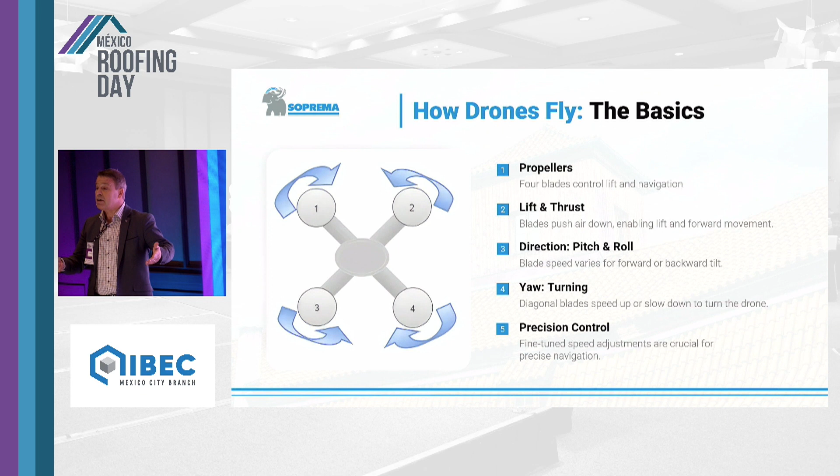First, I'm going to put up slides explaining the big points, and after that there will be video to visualize everything that I spoke about.

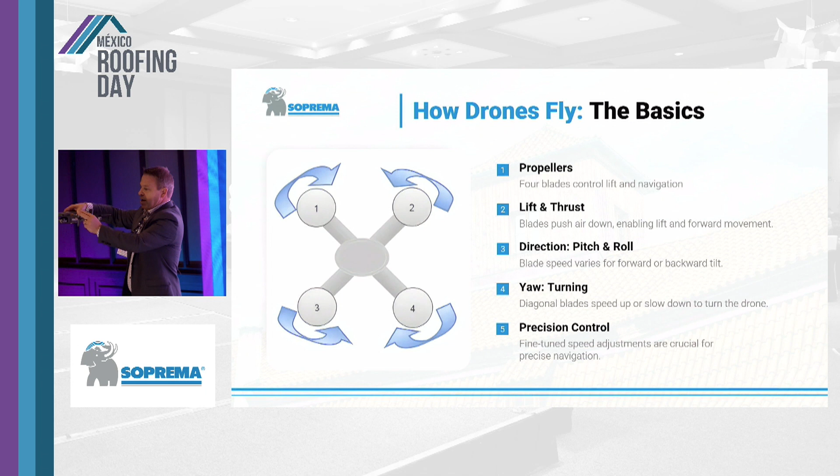So how does a drone fly? Easy, you'll say, well the blades turn and it flies. Yeah, for sure, but how does it turn and everything? It's just easy, it's just the speed. If you take a drone, by changing the speed of the blades, the drone can turn on itself, go this way, up, down. It's just a question of speed. There's a controller inside that manages the speed of each propeller, and this makes it turn and go everywhere.

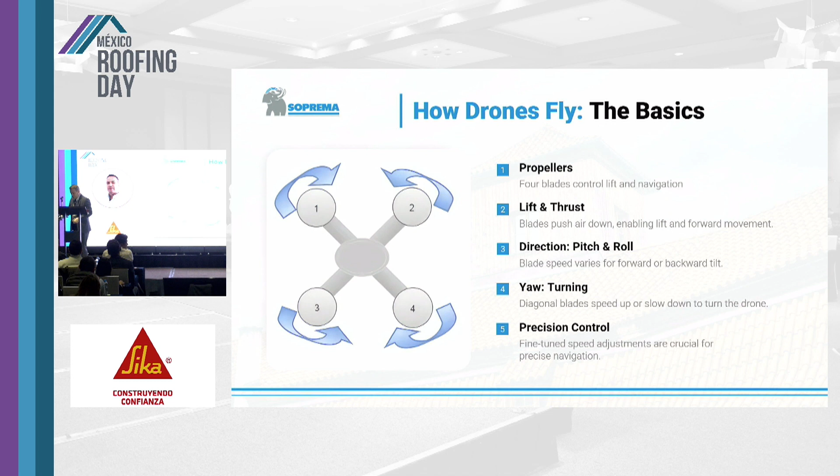So just the basics about drones - there are different types, but basically drones are positioned by GPS. There's a GPS on the drone, and it knows its position with the GPS. There's also vision - the drone can see. So when you're about 3 meters high, the drone will position itself with vision, seeing things and taking a focus to stay there. So it has GPS, and if it's inside, it will use vision positioning.

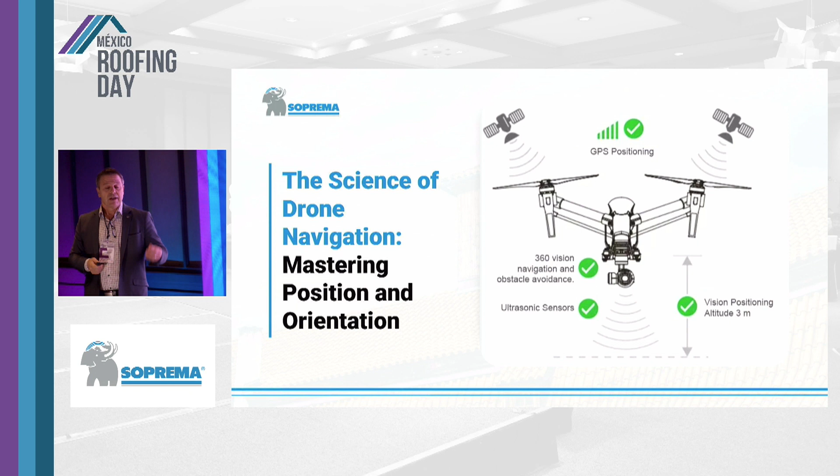Some drones right now also have ultrasonic sensors to sense objects, so they can stop if there's an object. And there are drones that use vision so well - I don't know if you saw the Skydio drone. This drone is crazy - you can run in the woods and it will follow you, and it will not hit a small leaf, it will go everywhere. This drone is just 3D vision and can navigate that way. Better than that, it now navigates in the dark by vision - they got near infrared vision, and it can navigate in the dark.

So this is basically just to tell you how drones are working - there's different sensor positioning, GPS positioning, that's really important. And that's the way a drone flies.

Now I've talked a bit about sensors. There's infrared sensors too - the small drone over here has an infrared sensor. Those infrared sensors are that big now, they used to be huge. At the beginning of my career, an infrared camera needed nitrogen to cool it, and it was that big and cost like $60,000. Right now you can buy an infrared camera on a drone, and it's crazy good.

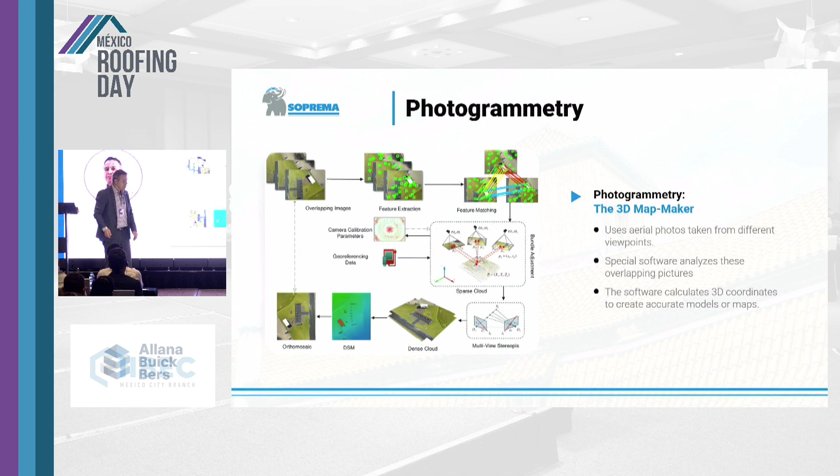Now this is the main thing I'm going to speak about - photogrammetry. So what is it exactly? That's just a map to show you - it's a bit complicated, but it's a software that does that. Photogrammetry is taking pictures. The drone, I'll show you a bit later, flies over a building and takes many pictures in a pattern. So it takes pictures, and the pictures overlap - all pictures overlap, like 80%.

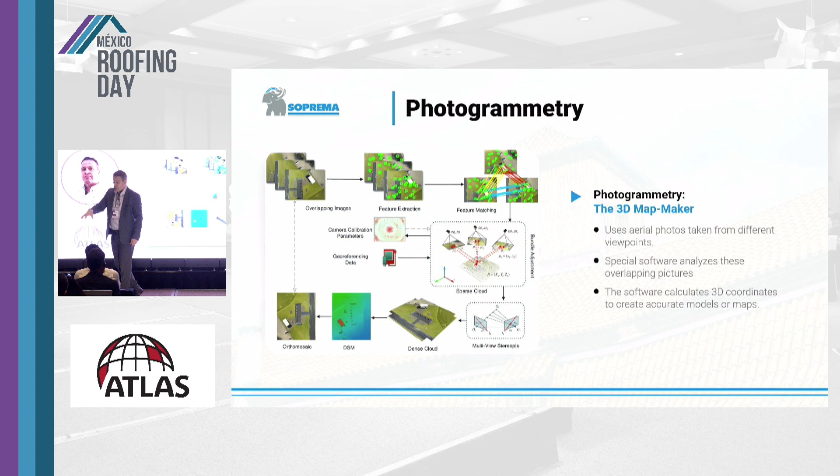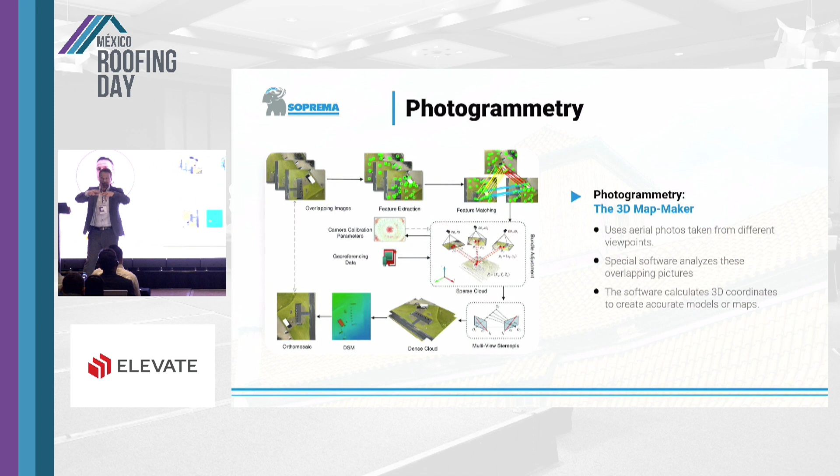So to do a survey of a building like this, it takes about 9 minutes, but it takes many pictures. Since many pictures see the same point, then you can build something in 3D. A bit like cellular - when you have 3 towers, they can locate you exactly because of triangulation. So it's the same principle - because of triangulation, you can reconstruct something in 3D. So photogrammetry is all about that.

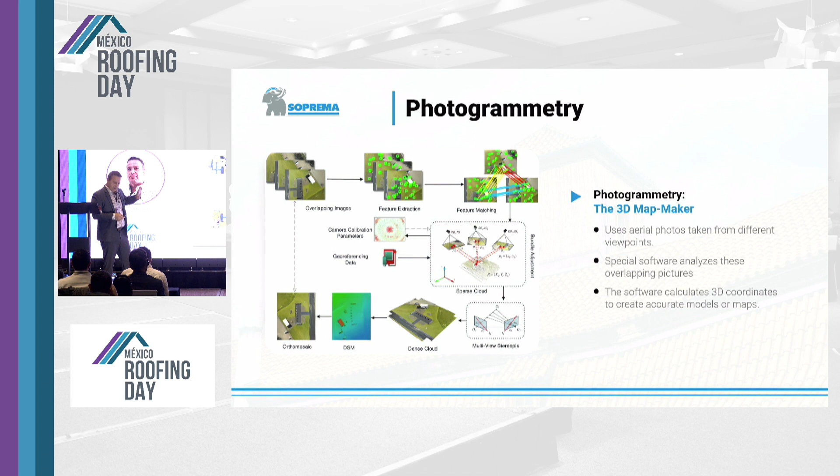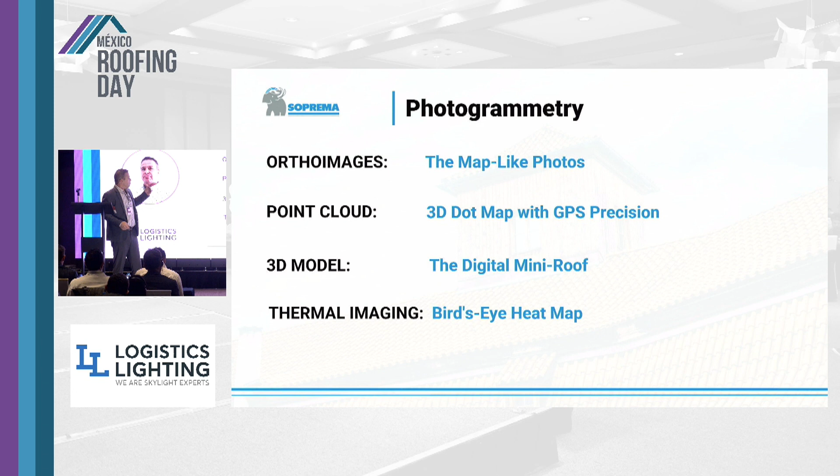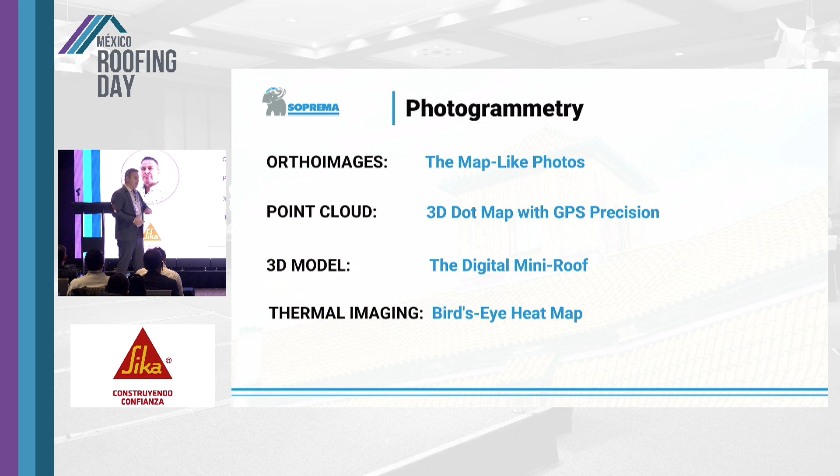So just remember that, and it's a software that does it - you don't need to do it yourself, there's software that does that. So there are 4 things in photogrammetry that we're using: there's ortho images, which is a big map of the area; there's point cloud, I'll show you what that is; 3D model; and thermal imaging. So all those are part of photogrammetry. By using all this, I'm going to show you what we can do with it, because we combine all this. It seems maybe complicated, but it's all done by software, and the result is what you need.

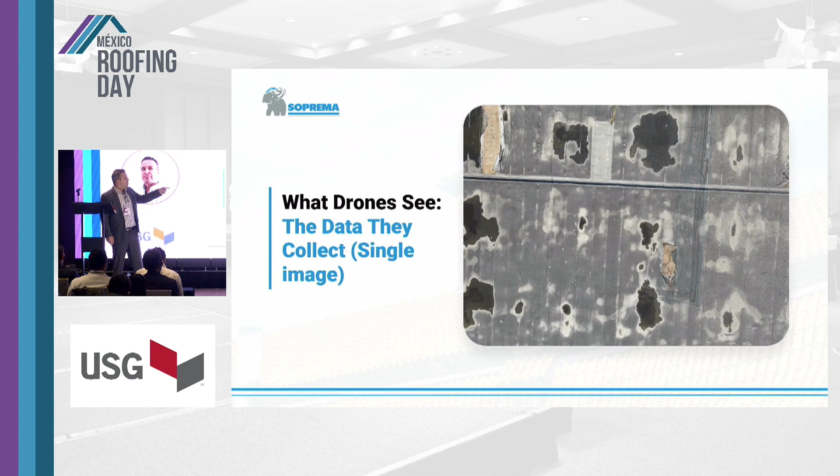So I need to go that way. So what does the drone see? This is just what I'm showing you here. It's just one image - you can see the quality of this picture taken by that drone. I'm 100 feet high, and you can see, it's just one picture. So you can see a lot.

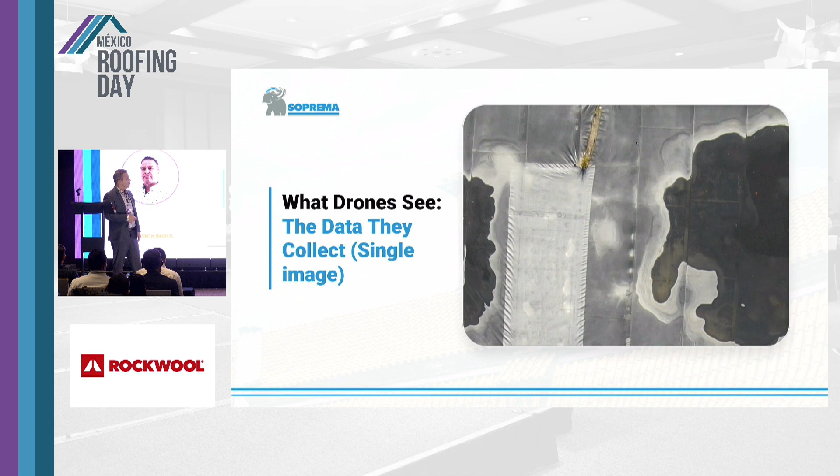When you have a view from the top, it's a completely different view than when you're walking on the roof and you see it from the side. It's just one picture that I'm zooming in and moving around. So the quality of the pictures is very good, and that's for that small drone, right?

And even in the parking lot, because when we do building inspections, we also do the parking lot. So it offers the customer way more than just the roof, right? You get also the parking lot, so you can offer more services to your client.

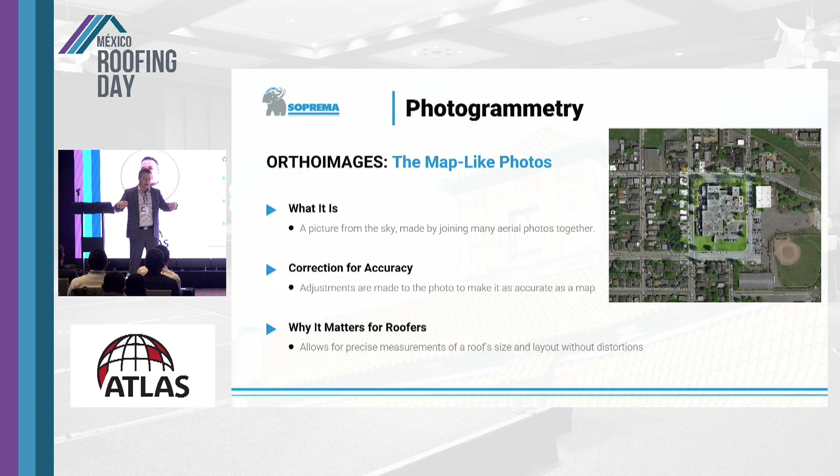So what is an ortho image? Like I said, it's a big image done with a drone - multiple pictures that are taken and put into a software. The software doesn't just stitch images together, right? It's a big map that's all to scale, and the map takes the place in Google.

So you see over here, we see the map, and we see Google map there. So we can import that map into Google Map. I think there's a small video there, just to show you the quality of it.

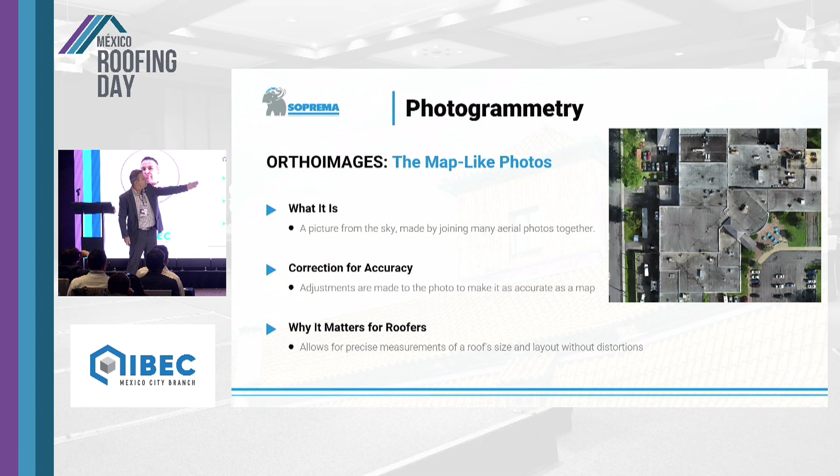See, we see Google there, and we see our map. See that you can zoom in, and this map is zoomable from everywhere.

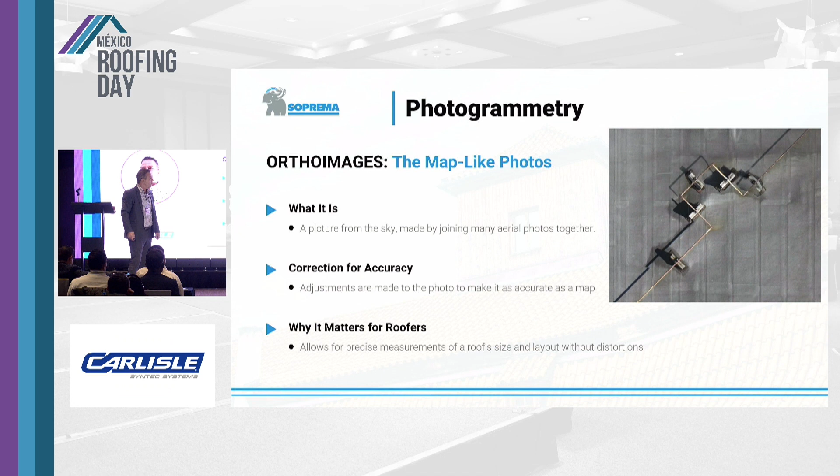So I'll choose the other one. So what is a point cloud? Well, I told you a point cloud is a million points that were done with the software. So the software creates a point cloud, and this point cloud has GPS on it. So every little dot has a GPS coordinate and X, Y, Z - you get altitude, longitude, and latitude of each of those points, and I'll show you later.

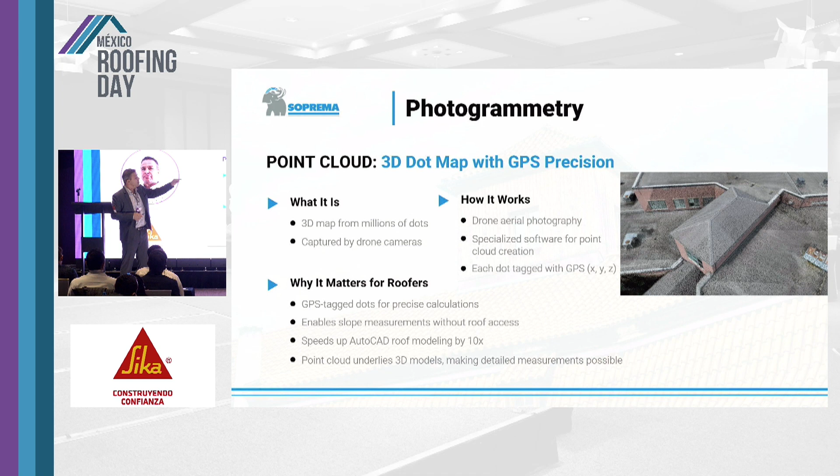So it enables possibilities, right? With this, you can import that into AutoCAD and do your drawing. It goes really, really fast. You can make measurements because of the point cloud. I'll show you in another slide, but you can do many things with it. And all that, like I said, will be put together afterward.

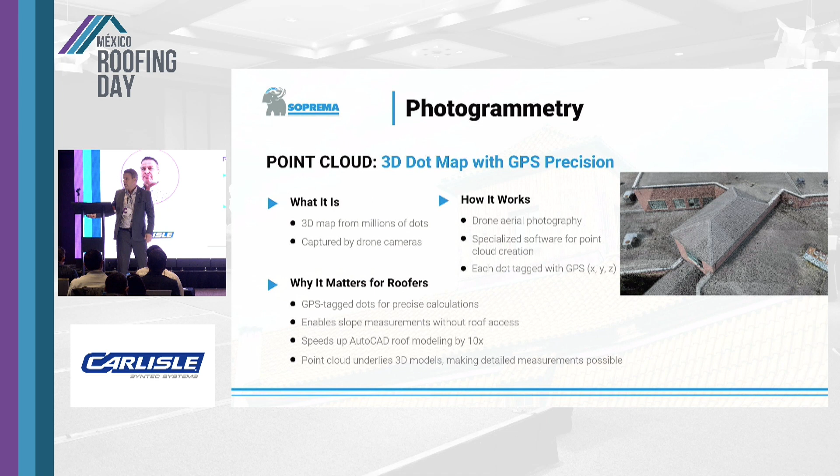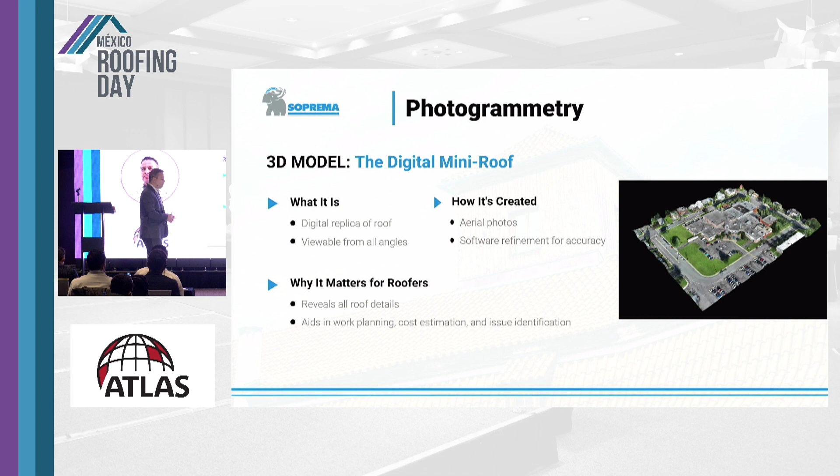So this is 3D photogrammetry. You remember a few slides ago, I said there are 4 things - now I'm showing the 3D model. So all this is taken with the same picture. With the same pictures, when you fly your drone in specific patterns, you will create your ortho image, you will create your point cloud, you will create your 3D model - all from the same pictures. I'll have video after that.

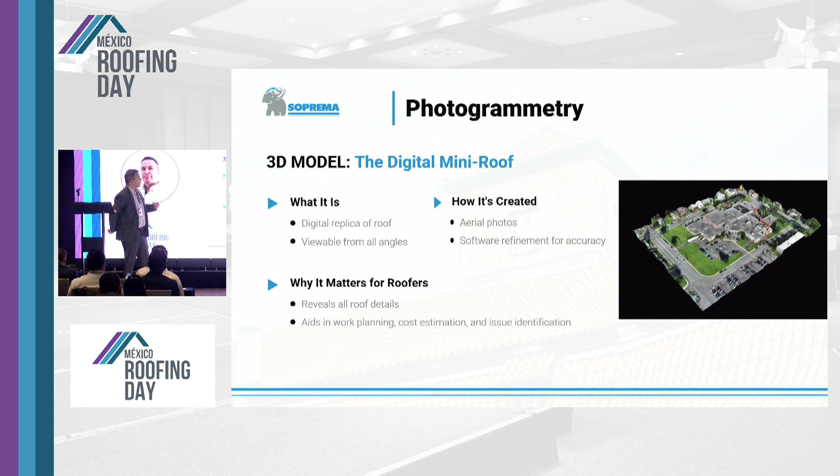So you can really easily see. I got a pointer over here... sorry, but it's not... no, it's not working. Okay, anyway.

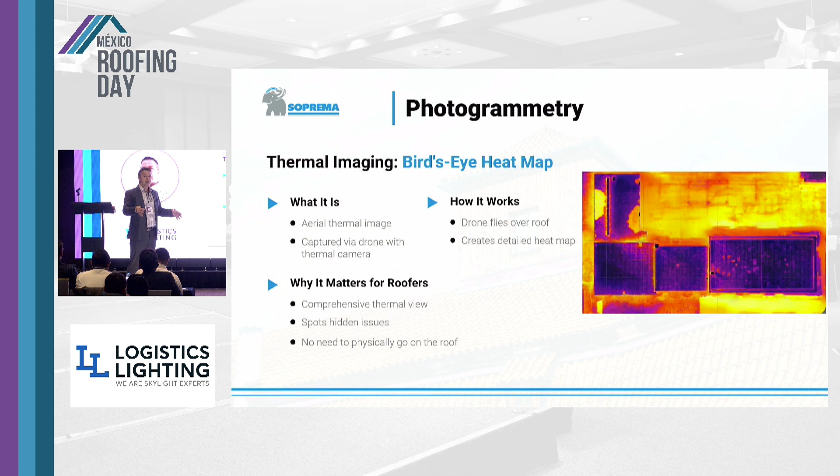So you see over here, it's hot - this is hot, so this is a wet area, right? I don't want to go into too much detail, but a quick explanation: an area that has water in the roof system, when the sun hits the roof, it gets warm. But as soon as the sun goes down, the wet area stays hot because it's water - it's a big mass, so it takes more time to get colder.

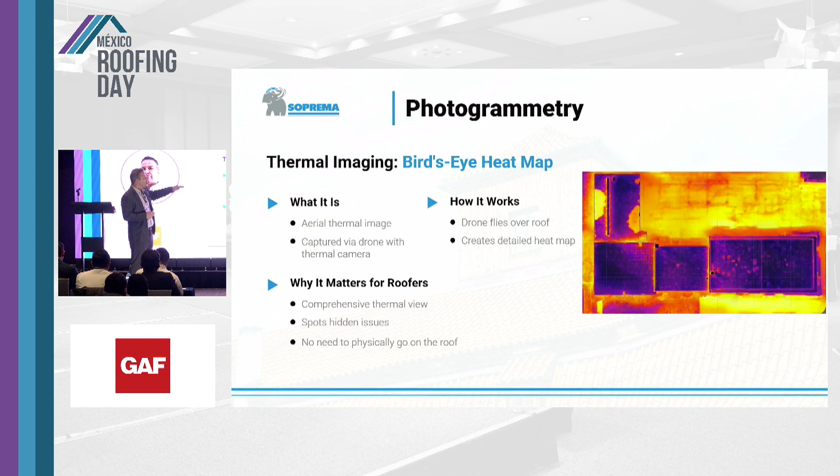So we just open the camera and we see. The only thing an infrared camera sees is hot or cold, right? That's the only thing - it doesn't see inside a wall, it doesn't see inside the roof, it just hits the first layer and tells you the temperature. So by knowing that this area is hotter, it means it's wet.

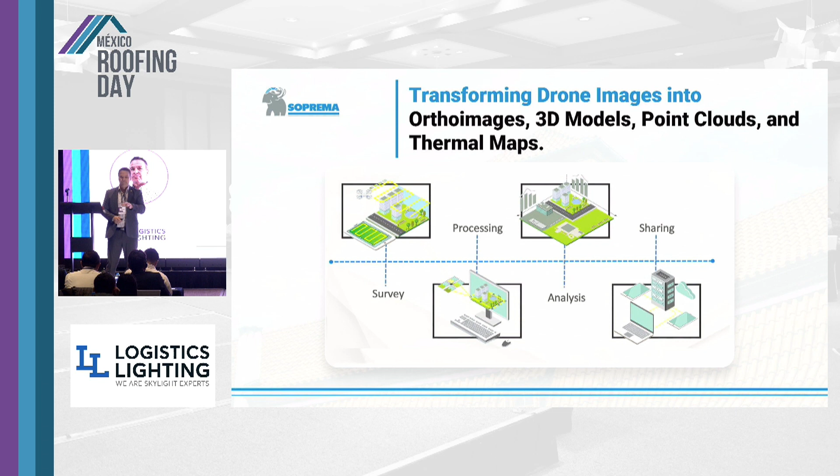So that's my first part. The second part will be more fun - we'll have images, we'll see more stuff, we'll see how it works. I just wanted to explain so you understand there are different things like point cloud, 3D, ortho image, thermal map. Now we're going to put all that together and see what we can do - how it can help you, the roofer, to make measurements and inspections quicker.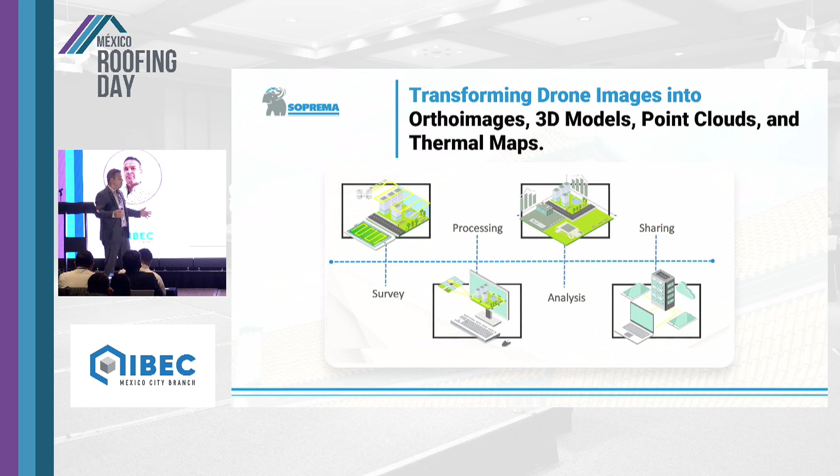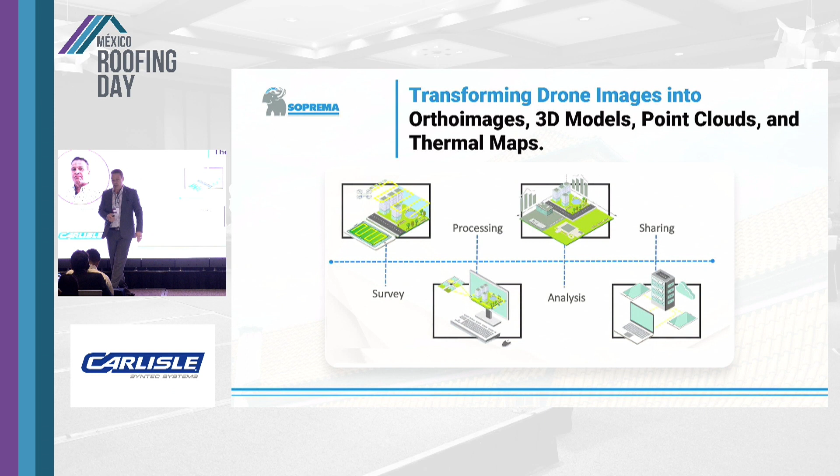So the process is really simple: you do a survey, you process everything on the computer, you analyze everything, and you share it with your client. That's the process of doing a roof inspection with a drone.

Okay, so just a small video explaining. This is where we are. I did a map, and the green line that you see here is where the drone would fly.

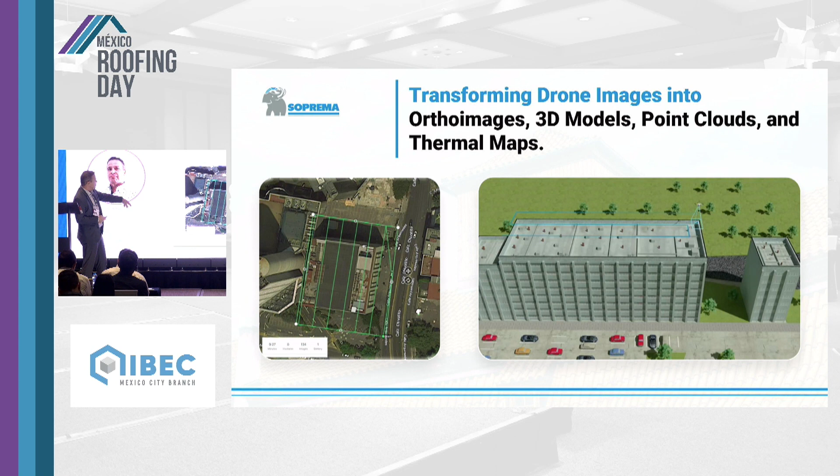The drone would fly in this pattern and take many pictures, about 134 pictures, taking 9 minutes 27 seconds. So it will fly and take the pictures, then you go back to the office, or it can be uploaded directly.

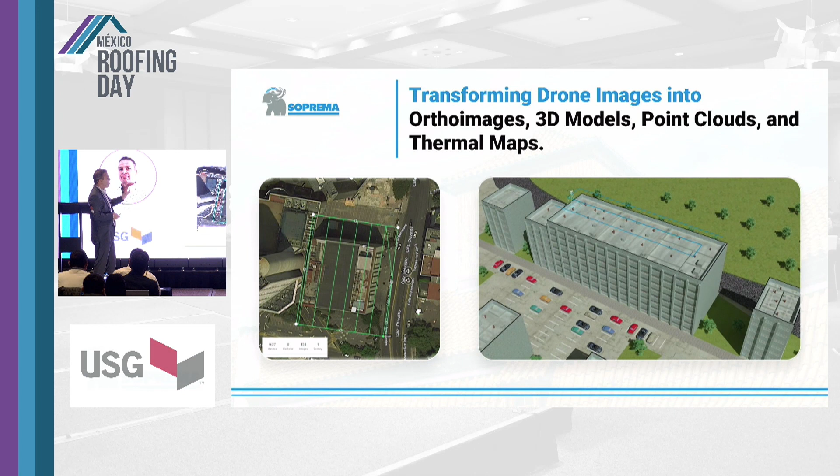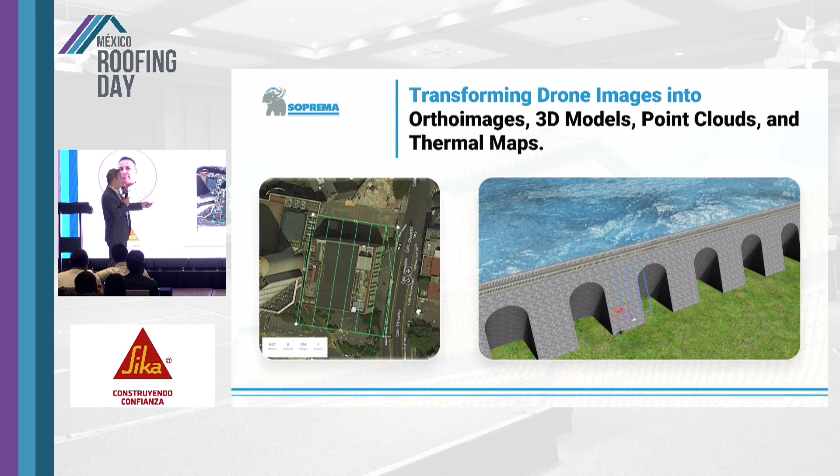See, the drone flies like this, over the roof. Right now it's close, but it's about 100 feet away. The drone can be used for roof, parking lot, dam inspection, so it can be used for anything. We use the pictures the drone takes, with overlap, to process and create our map. It can also do bridge inspection, anything.

And all that is automatic. You just set it up in your software and the drone starts and does its thing. You have nothing to do. The drone just flies, does all the inspection, takes pictures, everything, then lands back exactly where it took off.

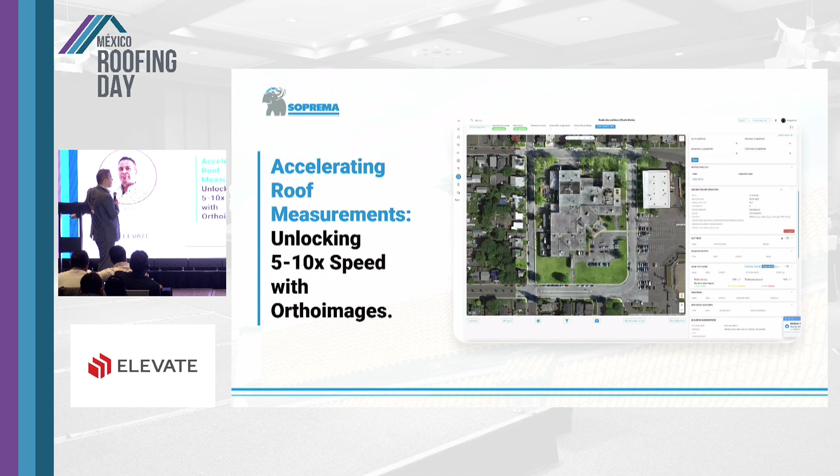So now you'll see that measurement is way faster. There's a video, see. This is an ortho image. This is the software we use, and the ortho image is inside this software. This is the Google map you have there, and this is the real map. So if you want to do a measurement on the roof, you'll see how quick it is.

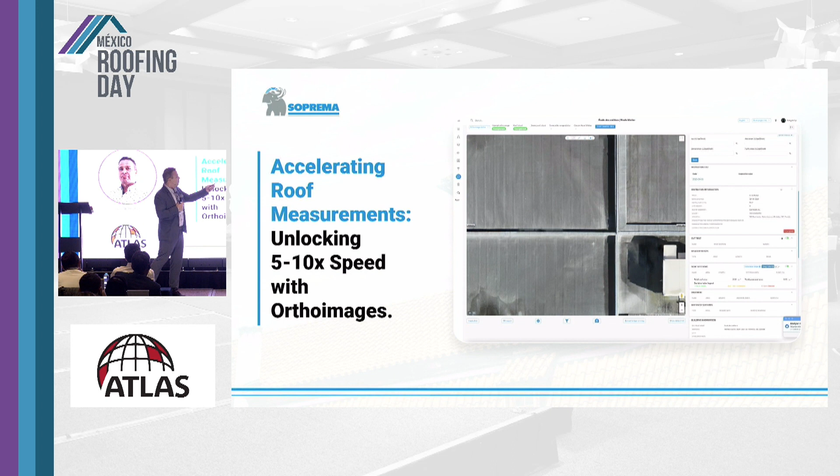You just go in, and you'll see that it's precise. You can move in, click on the corner, and it's so precise that you can click inside or outside of the parapet to make your measurement. So it's easy, you just go and make the measurement.

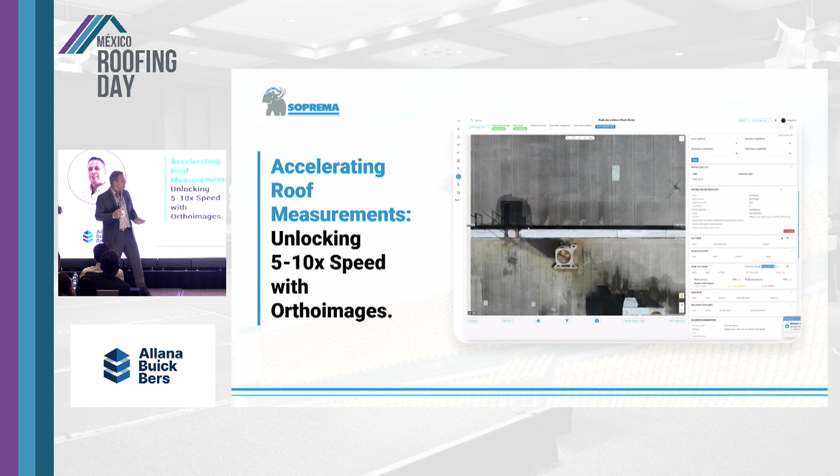Some people ask me, how precise is it? Well, I say it's more precise than two guys on the roof with a tape measure and the wind. When there's a guy 100 feet up pulling on a tape to make his measurement, this way is way more precise. You get millimeter-level results.

So now you've been measuring this roof section, and what's great about this software is that you can also manage the roof. You can put a name on the roof, then put all your info by clicking on the roof tag, and enter all the info of the roof. But I don't want to go into that detail. If you want info, we can talk about it after.

But what I'm saying is, if you want to make a measurement there, from there to the parapet, it's quite easy and quite precise. Making measurements by having two guys go on the roof takes time. This will save you much more time.

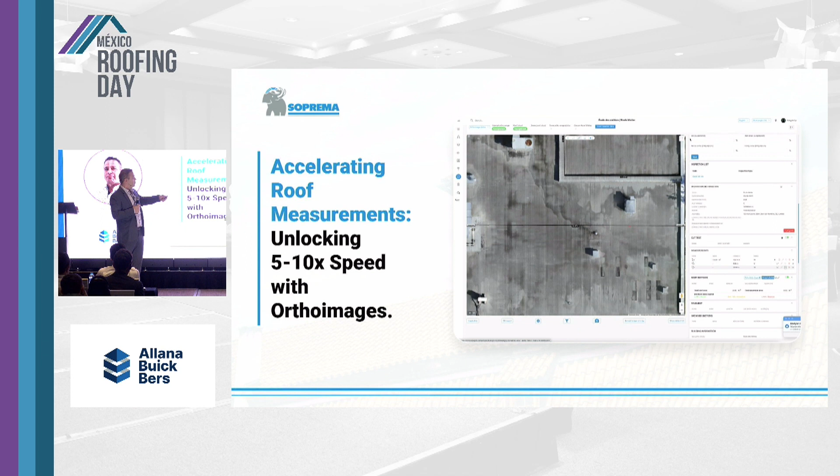I had a job to do, and the client was asking for an AutoCAD drawing. I said, you don't need an AutoCAD drawing anymore, you've got the real view of the roof. So why put icons on a drawing when I can show the real thing, because it's a real map. Even AutoCAD, for me, for roofs, is obsolete. We don't need AutoCAD anymore. We've got this, we've got all the measurements, we've got the drains, vents, everything. Everything is there.

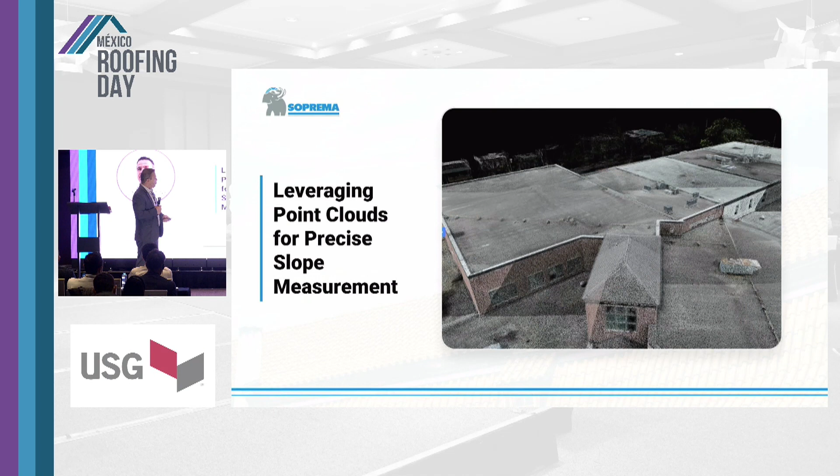Now, point cloud. I talked about point cloud, and asked why we use point cloud. You'll see. You see those dots, we'll zoom in and you'll see how many dots there are, and there could be many more. If you zoom in, each and every one of these little dots has a GPS coordinate.

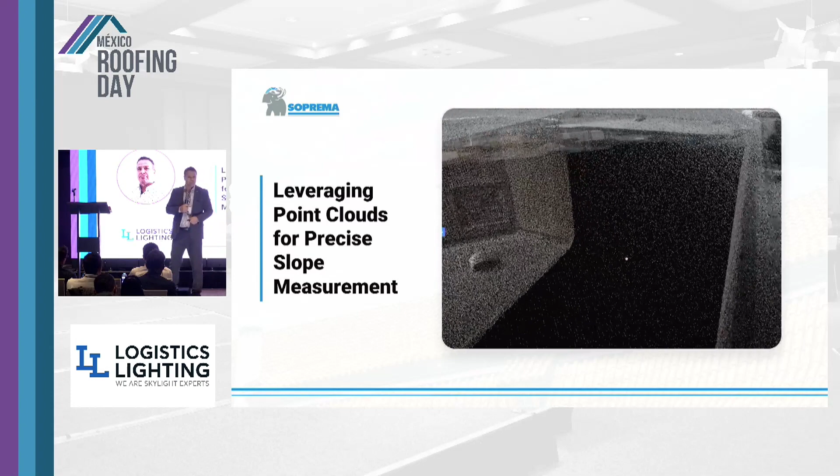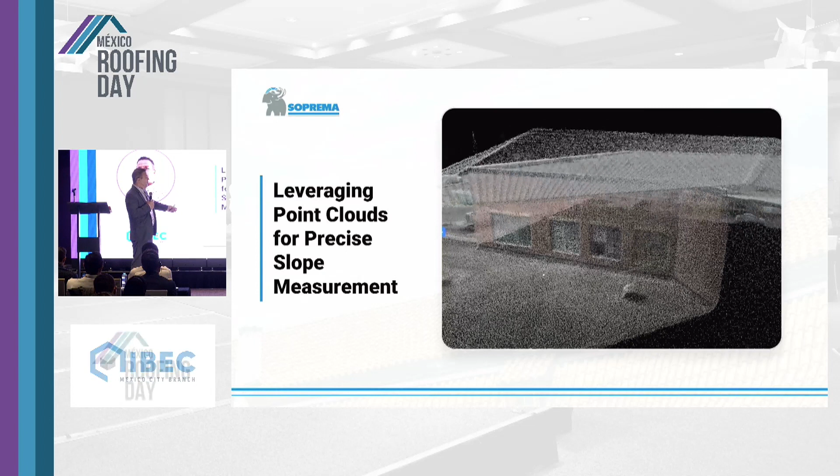So if you want to make a measurement, that's why we can measure on the map: when we click from here to here, we intercept one point cloud to another, and since they're GPS-based, we can measure the distance between both. You'll see we can also measure slope. So now, we can make measurements in 2D, but we can also make measurements in 3D.

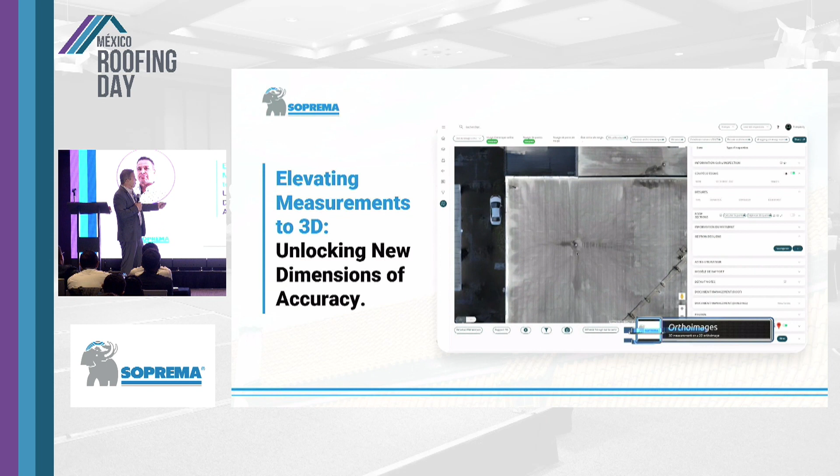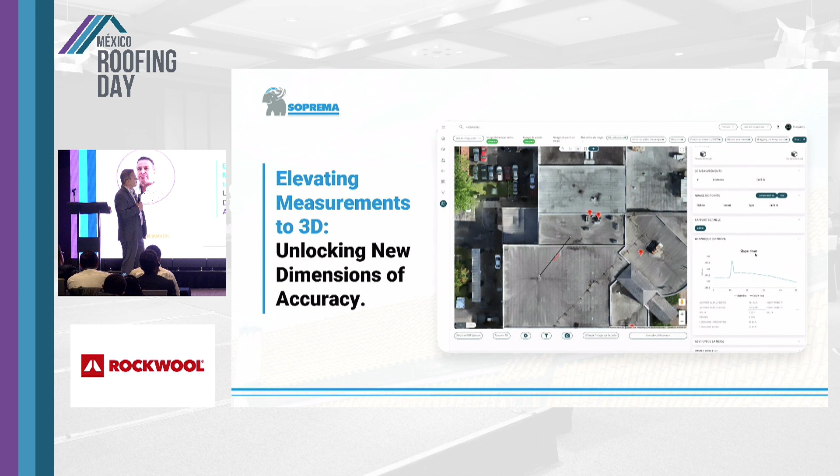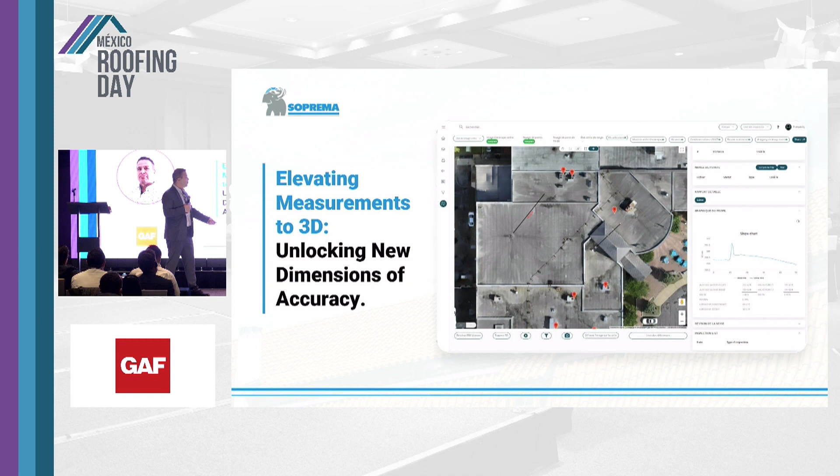So, same thing here. If I zoom in, I draw a line from here to here. Click, and you'll see the graph appear. And there's a dot, a white dot. It tells me where I am, it tells me the elevation, the difference in elevation, and it tells me the slope. So I don't need to go on the roof anymore to measure the slope, measure the height of the parapet, measure the slope. See over here, I did it over a roof, and it's all there.

So why can we do that? Because we got a 2D and we're measuring in 3D. That's because the point cloud is below, and the point cloud has a GPS coordinate in every dot. So with this, without even going on a roof, we can measure slope, we can measure where the equipment are, we can measure height, parapet height, everything, without even going on the roof.

So that's the technology right now. I had a project to do - I had 80 buildings to inspect across US and Canada. As a consultant, before Soprema, I was half the bid of everyone else, half the price, because I had this technology and they didn't. And I made 4 times the money I thought I would, because it went so crazy fast.

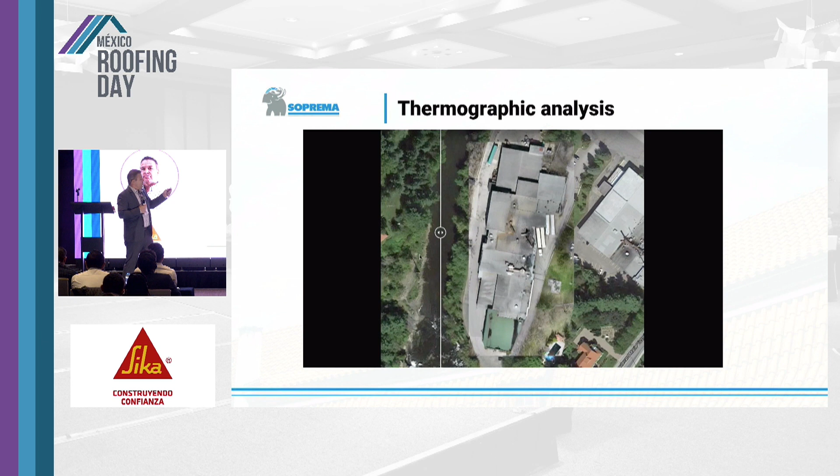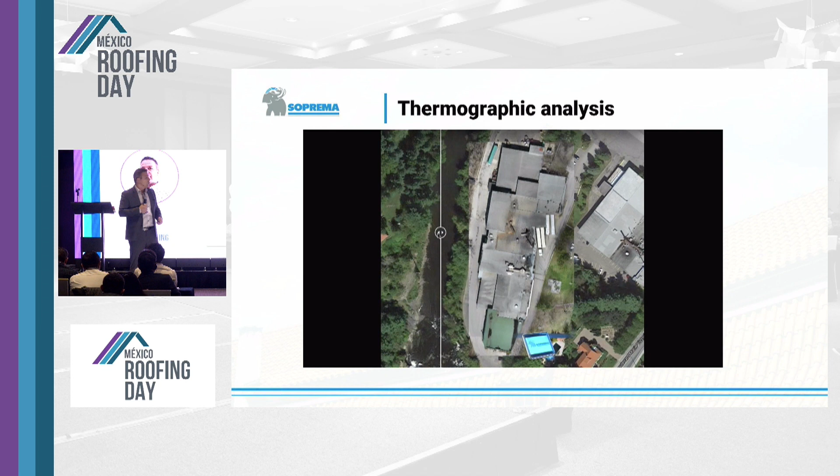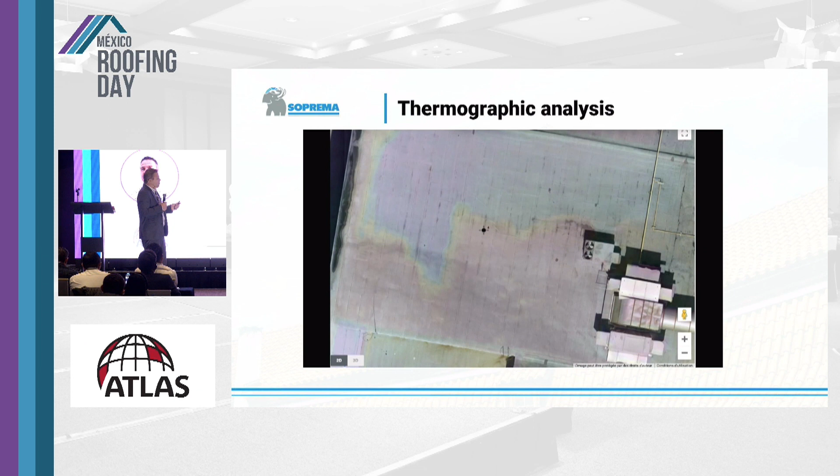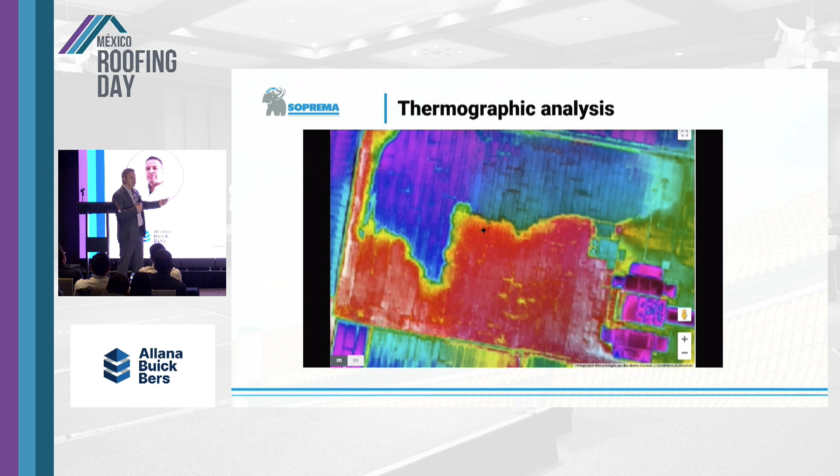Now, we said we could do thermal, right? You remember I said you can use a map, we can do a thermal map. But we can combine those. So we combine both, and it becomes really easy to compare, because the thermal map goes over the building. So instead of wondering where do I take that picture, where does it go, where is it, this or this - no, you see it directly. By overlapping both, and you can change the transparency, you can see exactly where your wet areas are. And with the software, you can draw around the wet area and it calculates the wet area. So you don't need to calculate it, you don't need to make measurements on it, since all the measurement is integrated.

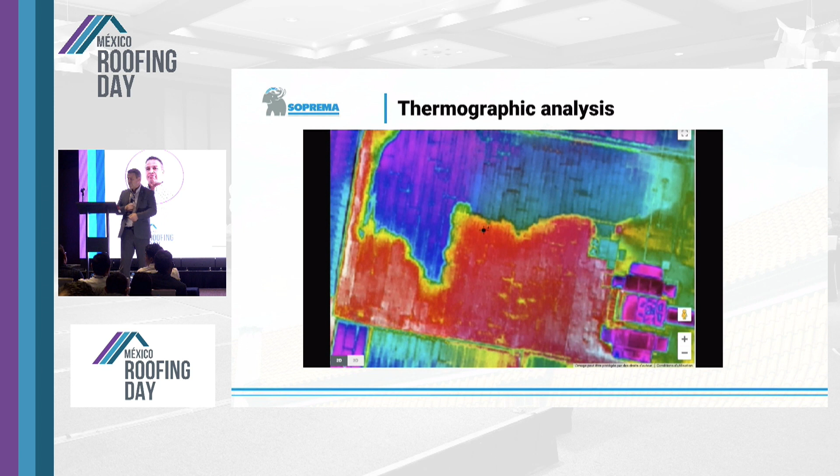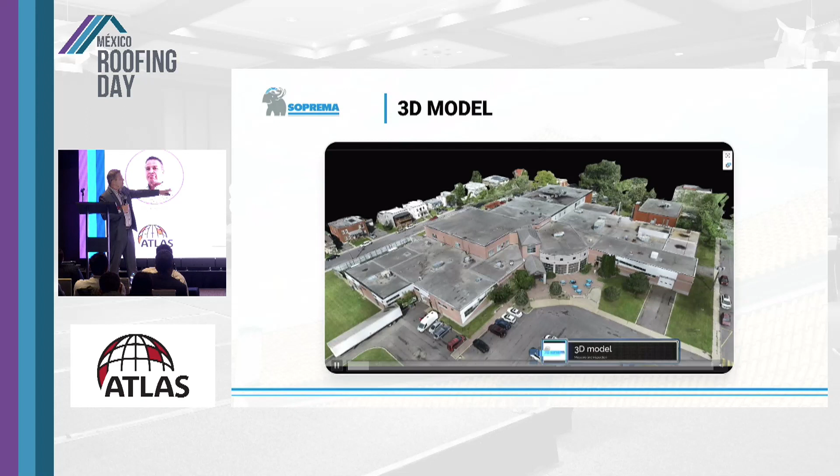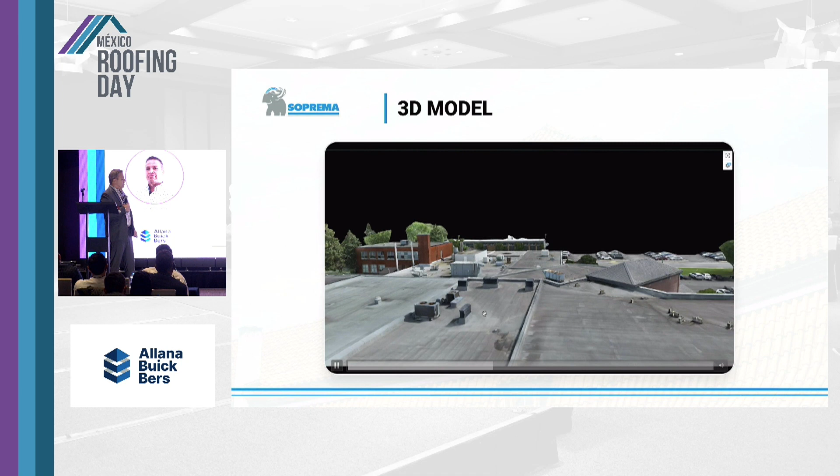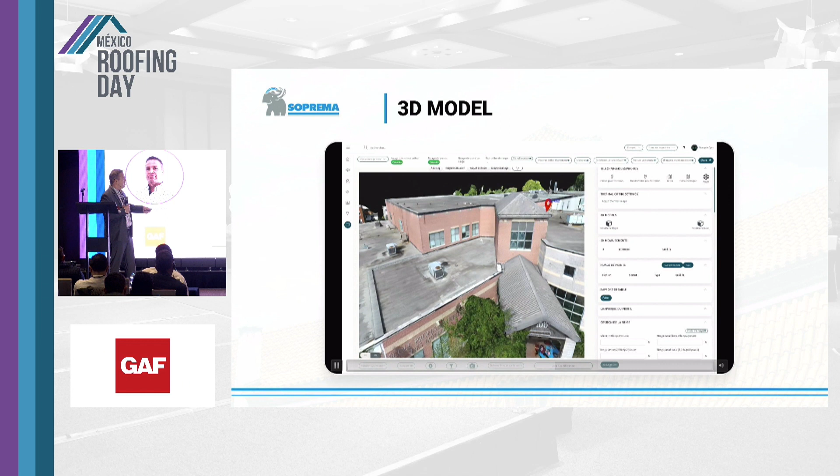Now the 3D, right? So this 3D model - it's all the same image that I took, the same set of images, but this gives you a view of the building and all of the environment, and you can take measurements also in 3D. And for the client, it's a revolution, because they don't need to go on site anymore. They just take that and see if there's a window there or not, if there's a ladder that goes on the roof, everything, and you can make measurements in 3D - you just click and make the measurement, and it's all in 3D.

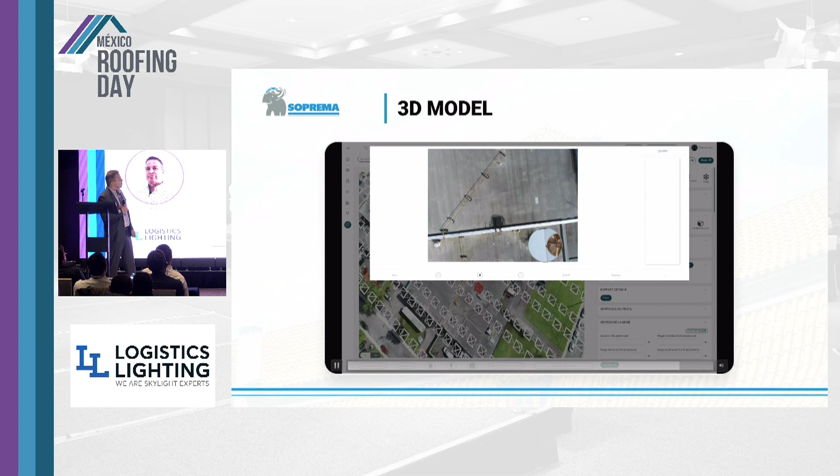So those are all the drone images that are located - this is the drone images. You can click on an image and you will see it. And there's a magnifier that helps you do the inspection, so you can zoom in.

So basically, what we've seen is using a drone is not just video and pictures. There's photogrammetry software that does that. It's really not complicated, really easy - it seems complicated, but the end thing is not complicated. You just take a series of pictures, put that into software. There's software on the market called Drone Deploy, that's a good one. Pix4D is a good one too. You take your pictures, put that into Pix4D or Drone Deploy, and it will produce point cloud, 2D, 3D, and thermal - just by using one software.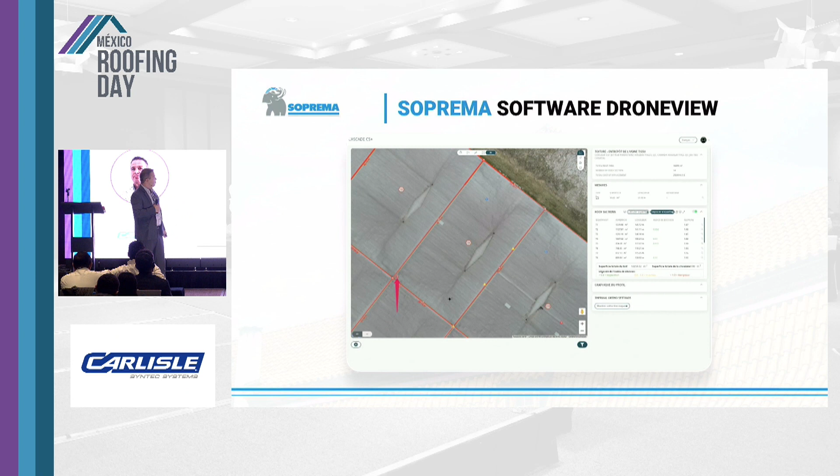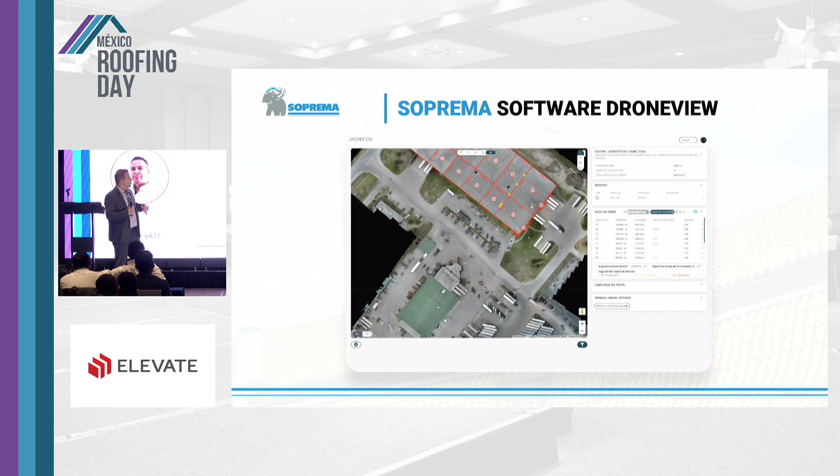Now, just to show quickly a software that uses all that data - what you see here is just a quick view, but this is all a project. You have all your roof sections, you can click and it will take you directly to a roof section. You have deficiencies, so you can see where the deficiencies are. You can search. The idea here today is not to promote any software - that's not the point. The point is that with this technology, there's a way to put everything together into a package that will help you manage your roof.

So when you think about it, the possibilities are quite infinite. You can put a tag - like a client that would like to manage his HVAC unit, let's say. You can put a tag on an HVAC unit, build your tag like this, and enter all the info. So it's really, with those images and with 2D, 3D, and thermal, you can really manage your roof and client roof.

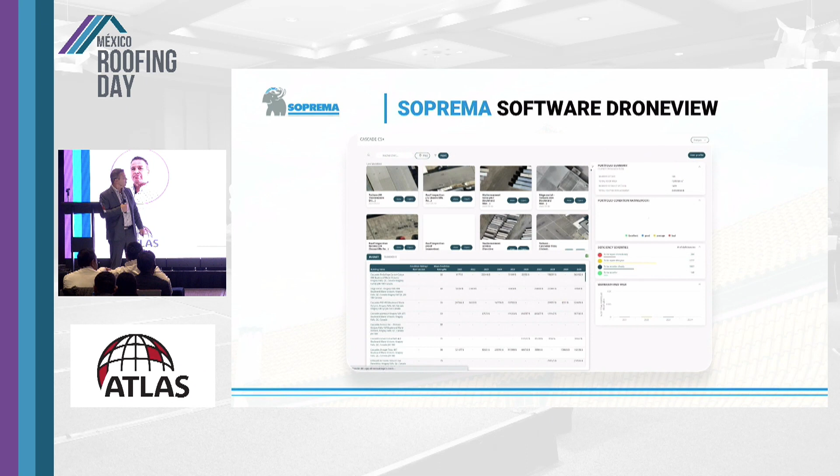I think it's finished. There's warranty, it's just to show you.

Now, next step, right? So we've done all that. We've done our drone, we've done our inspection, we've got our image, we can make measurement on it, we can do everything that we want, slope measurement, everything, but we still need to do it manually, right?

We still need to make measurement on it. So next step is to enter with AI and computer vision. Maybe we're going to be 20 times faster instead of 10 times faster. So it's quicker bid, quicker result, and when you use AI, you'll see that it's precise. Let me show you.

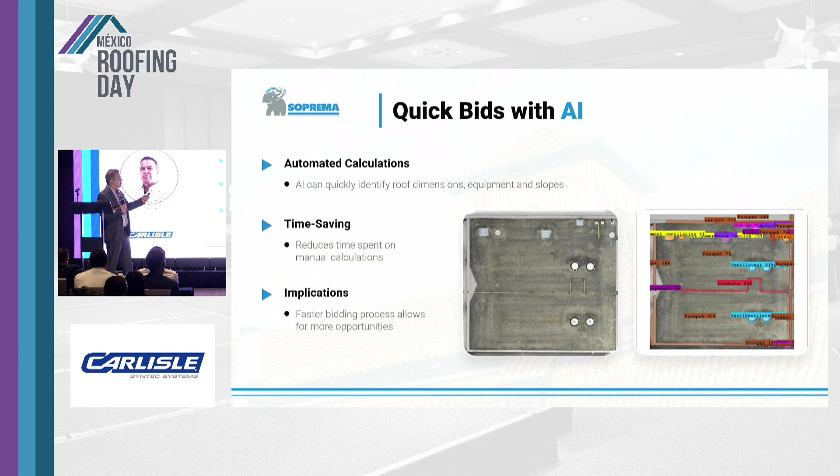See, this is a simple roof, right? And this is AI. So we take the roof, we put it into a system, and it comes back with all the info, all the equipment on the roof. It will tell you which equipment it is, exactly where it is, the area, the dimension, and it will calculate the area of the roof all automatically.

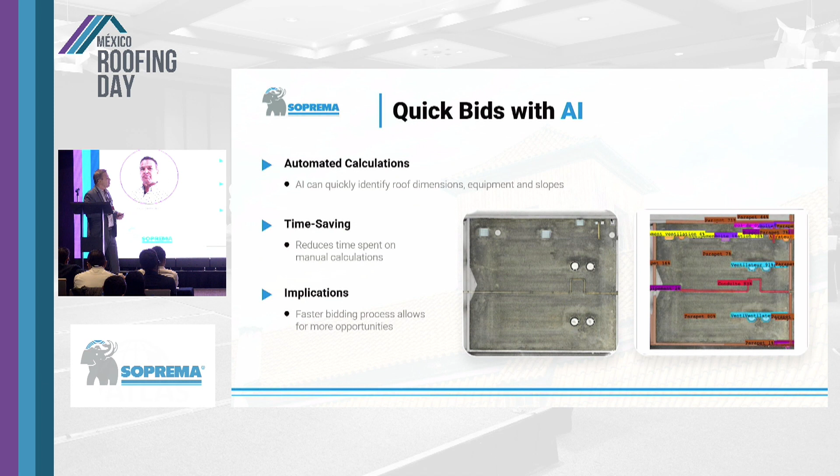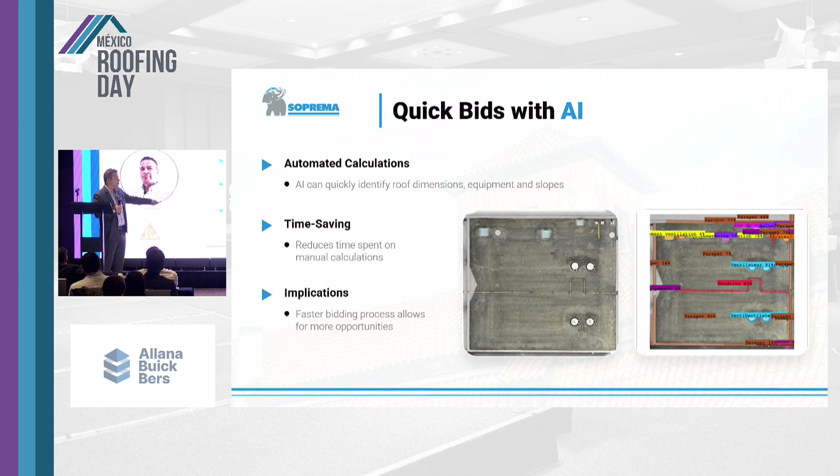So right now we're in a beta version. It's going to be launched in Europe soon, but it's working great. So it's really a time saving. You don't need to go on the roof and make all your measurement. It's all done automatically. You just throw your image into the system, and it comes back in a few minutes, and everything is done. So it's really a time saving and faster bidding also, right?

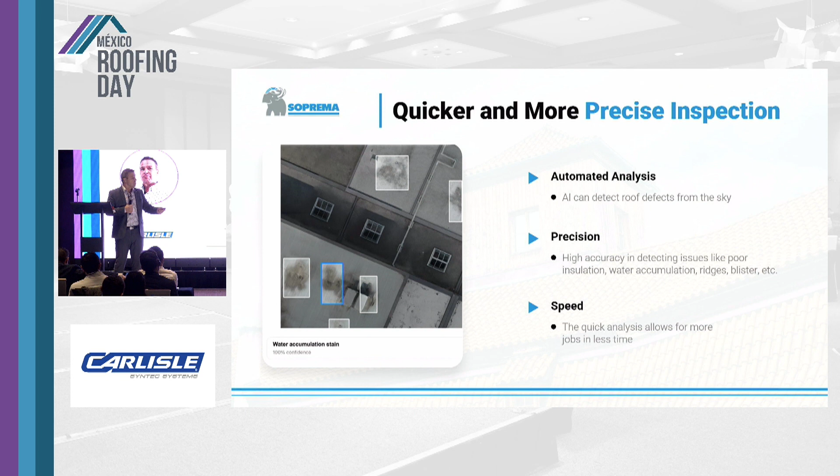Now with AI, you can do also roof inspection. So AI can spot water accumulation. It won't spot a membrane that is not fixed properly or things like that, small things, but it can help you do the first inspection before going on the roof, right? So it's really, really quick to do an inspection with this.

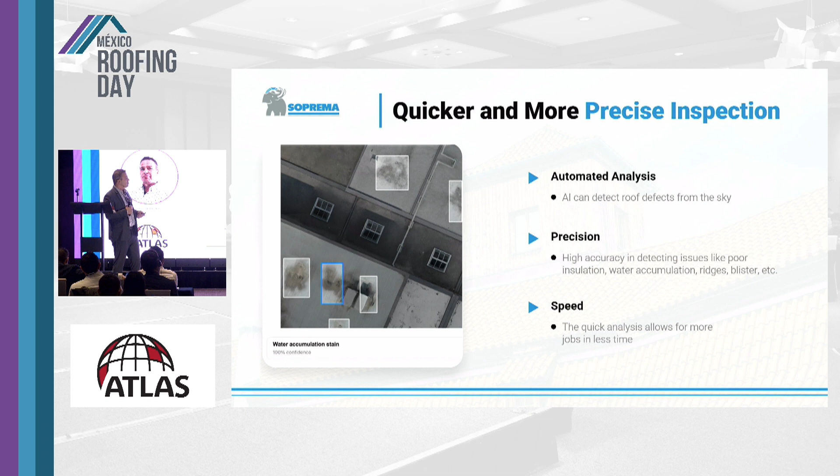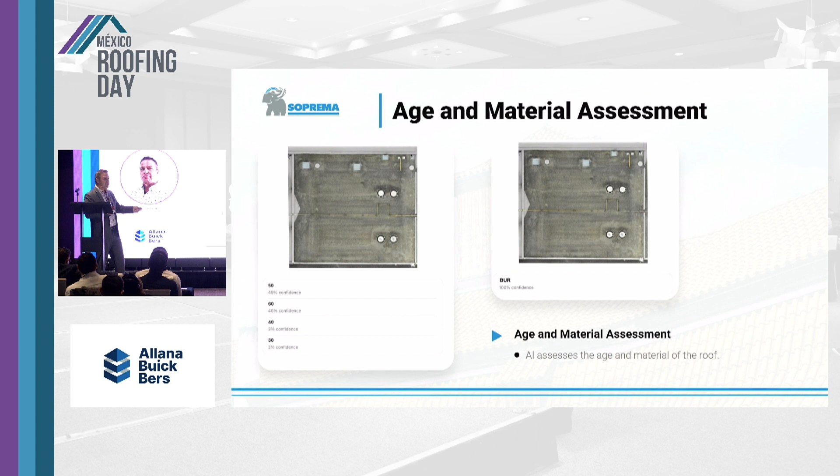Now AI can also tell you what kind of membrane is on the roof, and it's working great. You just take the roof, send it for detection. It will tell you it's a BUR or it's an EPDM, a PVC, a TPO. So it's working great. And also it will tell you if we go on a 0 to 100 scale—the US Army used that scale, 0 to 100.

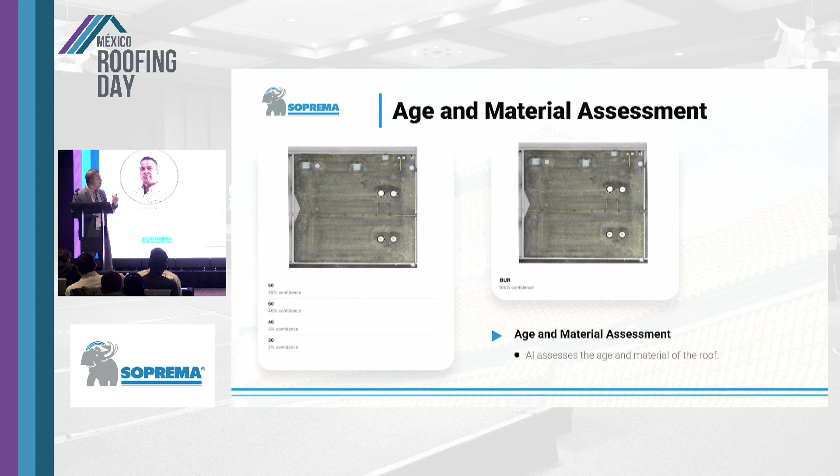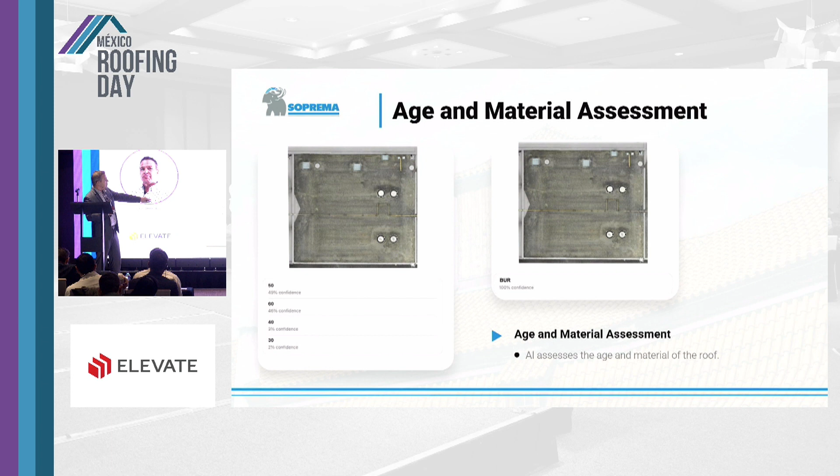They got to qualify their roof. So just by the image and the AI—I've put thousands and thousands of roofs of inspection in—so by seeing the image, it can tell you if it's a 50 or a 60. Now it says 49% confident that it's 50, or 46% it's a 60. So we can say it's a 55. So this roof would be like a 55 condition, roof condition.

You know, it's a way of saying if a roof is in good condition. 100 would be perfect, and 0 would be dead. So 50, 55 is pretty good. And this is done all automatically, right?

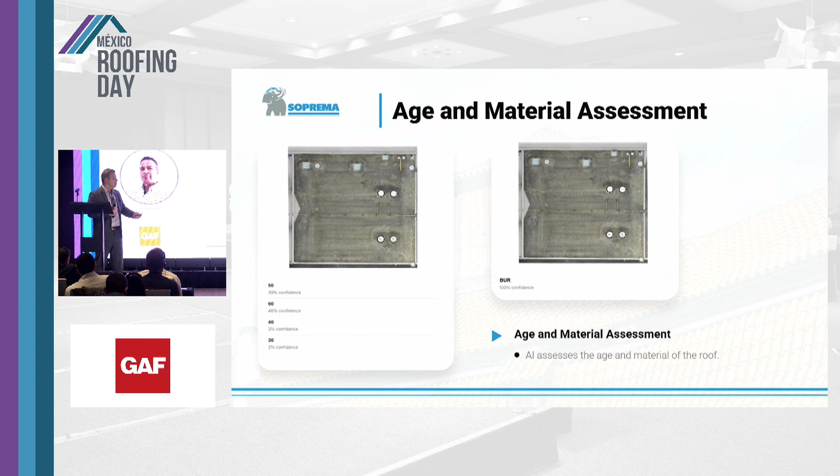And we also developed an algorithm that uses a different kind of function. Now it's technical, but a Weibull function—it's used to predict life expectancy of equipment. So it's an equation that starts slowly, then like a roof, like in life, a roof will start to get older. It will get older slowly, if I could say. Then it will accelerate, then it will go slower—it will deteriorate slower. But at one point, it deteriorates faster. It starts slow, then it deteriorates faster.

So we've programmed that equation, and by using AI, by using all the info that we got, we input information: the year the roof was installed, the current rating, and the minimum rating we want to replace the roof at—let's say 30, if the roof reaches 30 we want to replace it. And it will calculate, using the current year—2023—the year of installation and the year the roof needs to be replaced.

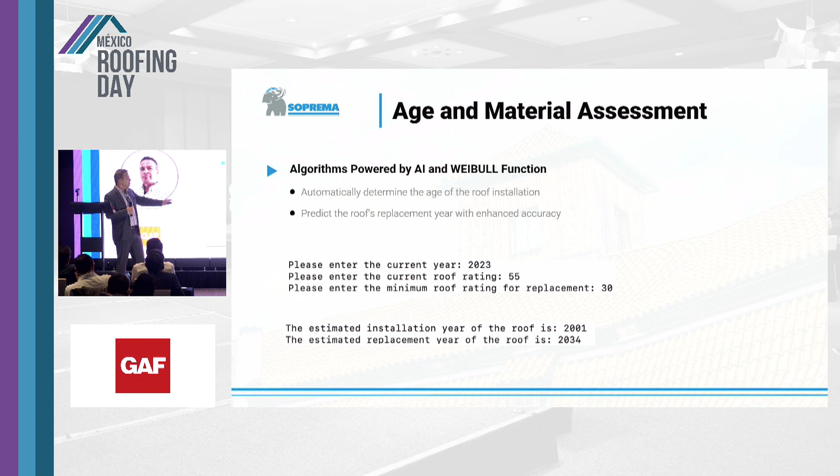That's not perfect, but that's AI, right? AI is something that we build along the way. We make it better and better and better. But I've tested it and it's pretty good—with all the data that I have, I tested it and it's really accurate. But you know, if a hurricane comes, all this is not good, right? So this is just normal deterioration.

So for the roofer, all this technology, drone, it makes accurate measurement. It goes faster to make a bid. Also, if you use a software where the client can connect, they can see the roof, see their 3D model, and have access to their report. It really creates a relationship with you and the client. That's what you want to create, right, to get more business. So those kinds of software and technology can help for that.

You could say, well, that's good, but I've been using my own way for 25 years and it's going good and I don't want to change. But remember what I said: if you don't change and don't use that technology, it's not going away. It's going to be there, and it's going to get better and better.

And now it's building facade, building envelope, and it's going to be there for parking lots, dams, bridge inspection. With AI, it's starting. So it's something that if you don't do it, your competitor will do it, and they're going to be ahead of you.